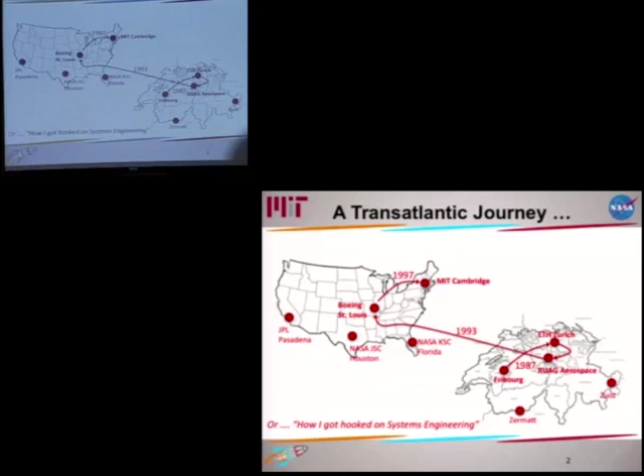I'm from Switzerland originally. My hometown is called Fribourg, on the language border between the German and French-speaking parts. I went to ETH Zurich, then a company called Ruag Aerospace, then made the big jump across the Atlantic to what's now Boeing - back then it was McDonnell Douglas in St. Louis - and eventually found my way to MIT.

The personal reason I came to the United States was that Switzerland was just getting too confining. It's a beautiful country if you've been there, but it's got a lot of rules - it's almost too perfect, and I just needed to come to a place that had a lot of opportunities. So I want to talk to you about this experience and the reason I came here.

There's one big thing wrong with this picture - what's the biggest flaw on this graphic here? So what if we showed them in the right proportions - what would it be roughly? Smaller - like Rhode Island? It's basically kind of like New Hampshire and Vermont, it's like 1/50th, right? So the surface area is way smaller.

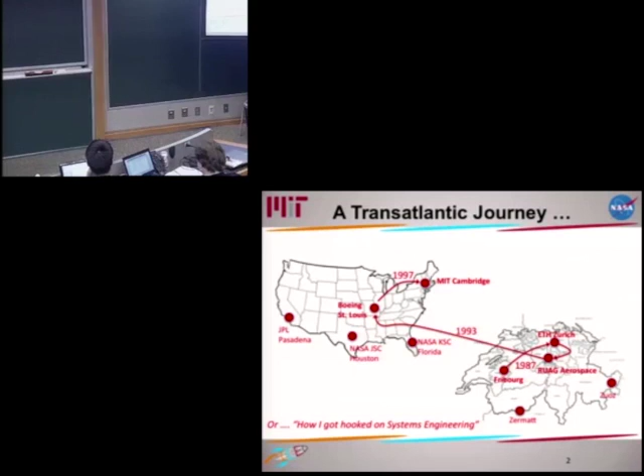So it has great life cycle properties, and that was really the big driver. But there was a problem, and every small country faces that problem. Israel, Singapore—because the country is so small, there's basically no cruise flight. You take off, then you're flying maneuvers, pulling Gs, and then landing.

The average duration of a mission in Switzerland is 45 minutes. The average mission duration for the Navy is like 90 minutes—you take off from a carrier, you climb, you cruise, and during cruise flight things are very benign. So what matters is how many load cycles per flight hour the structure will see. The spectrum in Switzerland and other small countries is about 3 times as severe. That's the number of flexing cycles your wings and fuselage will see, and there's a phenomenon called metal fatigue, and that's a big deal.

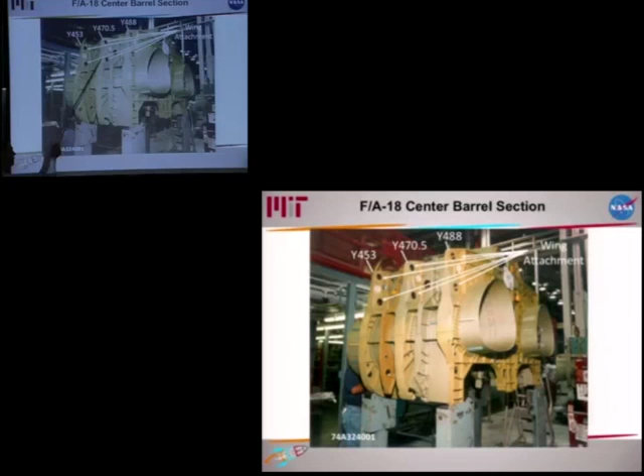This is a picture inside of the F-18. This is known as the center barrel section, the heart of the structure, the fuselage. You see the wing attachment points—these are called the wing lugs. That's where the wings attach, where a lot of the shear loads and bending moment from the wing are transferred to the fuselage. You see the two engine ducts. This is where the rubber meets the road.

If you're flying an aircraft differently than it was designed, you'll start to get small cracks, micro-cracks, that start at the highest stress concentration points, and those cracks can grow. If they become unstable, your aircraft can break apart in mid-flight. That's actually happened—for example, the F-15 is flown by a lot of National Guards, so in some sense this is also an issue in the US, but more at the National Guard level. Some F-15s broke up in mid-flight, and the whole fleet was grounded, because of metal fatigue.

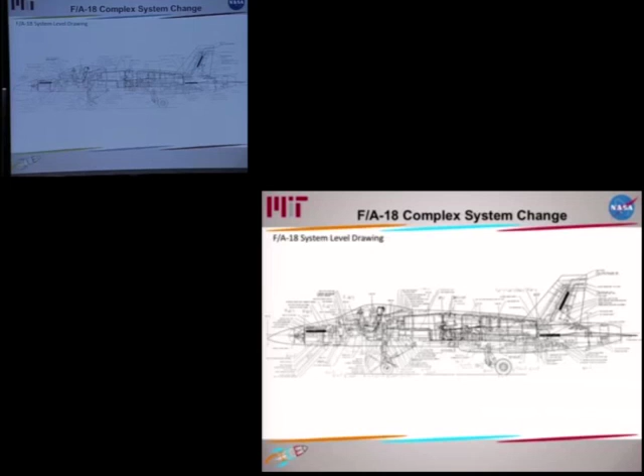So one of the jobs we had was to avoid that problem and think about the whole aircraft. This is a cross-section of the F-18, the single-seater version. You've got the radar system, a lot of avionics, the engines back here, and a lot of the subsystems, hydraulics, etc. We had to think about what things in this aircraft need to be redesigned ahead of time to avoid these problems, namely the problems with fatigue.

I'll give you one example of a change we had to make. That central barrel section of the aircraft I showed you had traditionally been made out of aluminum. Aluminum is a great material—it has great strength, it's lightweight, it's easy to work with in manufacturing. But it doesn't have great fatigue life properties.

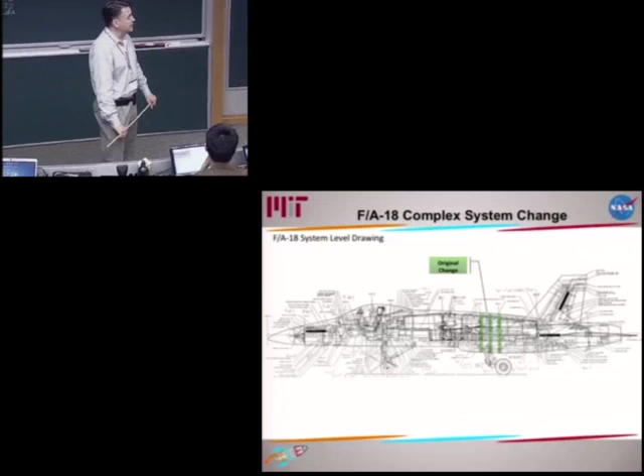So after some analysis, we decided to replace aluminum with titanium. Remember last night when Jeff was talking about the superconducting magnets, and we found out it's a titanium alloy—titanium is a great material. It has great thermal properties, great fatigue properties, and doesn't propagate cracks very easily. The problem is it's expensive and heavier—much heavier. It has a density of about 4,400 kilograms per cubic meter, versus aluminum, which is about 2,700. But we did decide to make that change.

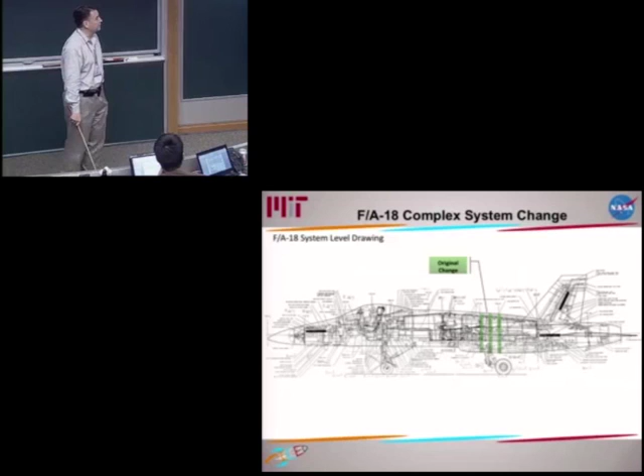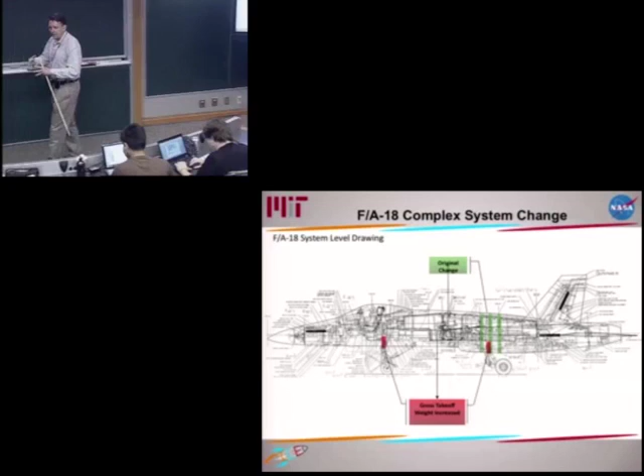We made some other changes as well to get the aircraft's fatigue life to where it needed to be. The problem is this is a complex system. By making that change—shown here in green because it was a good thing, giving us better fatigue life—other things happened. Gross takeoff weight, meaning the weight of the aircraft with the passenger, fuel, everything included, was increased, and that leads to a decrease in range.

Another issue is the center of gravity of the aircraft has been shifted—not a lot, just by a couple inches, but shifting the center of gravity in a complex system like this is a big deal. You have to make sure you have pitch stability in all flight conditions. So this was a bit of a challenge.

A bigger issue turned out to be that we've stiffened the fuselage. This change plus some others—shown here with this line—affects the natural modes of vibration. Every structure, even a simple rod, has natural modes of vibration. Essentially, if you excite it, it will vibrate like the string on a violin. Stiffening usually leads to higher frequencies, so these natural modes of vibration are now higher. That's usually a good thing.

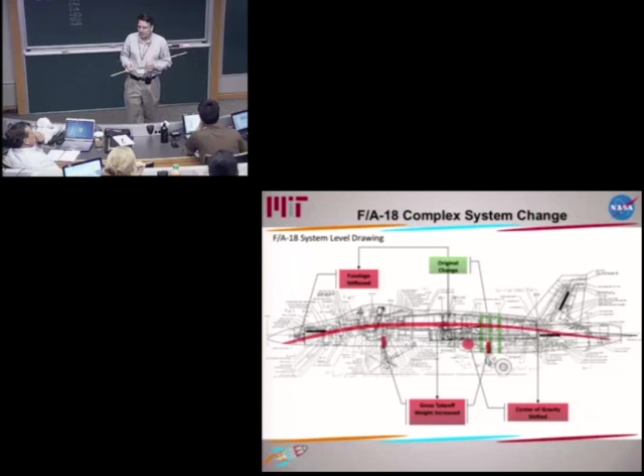The problem is that in a fighter airplane, you have in the flight control software, when the pilot actuates the stick, some filters in the control software, some notch filters, because if you put a step input into the aircraft, the energy at those natural modes of vibration could be destructive to the aircraft. So you have to reduce the energy at those frequencies.

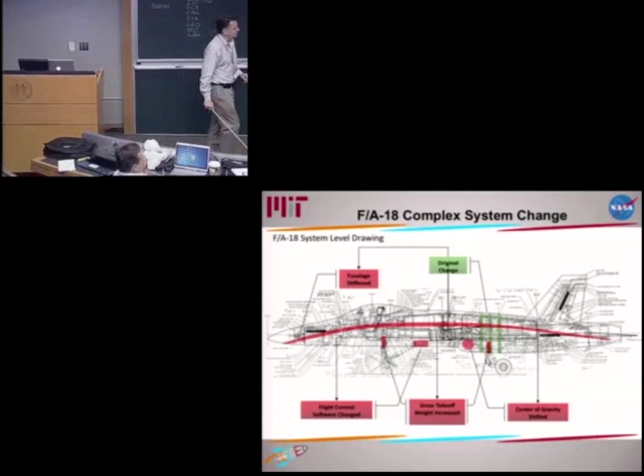So the problem now is that we have flight control software, but we've changed the properties structurally of the structure, and the notch filters are now misaligned with what they were. So we had to retune the notch filters in the flight controller. It's flight critical software, so it's like opening the box and the warranty is void. Even if you just change a few lines of code or a few parameters, you now have to retest and recertify the flight control software, because you don't know what unintended consequences the change could have on other systems.

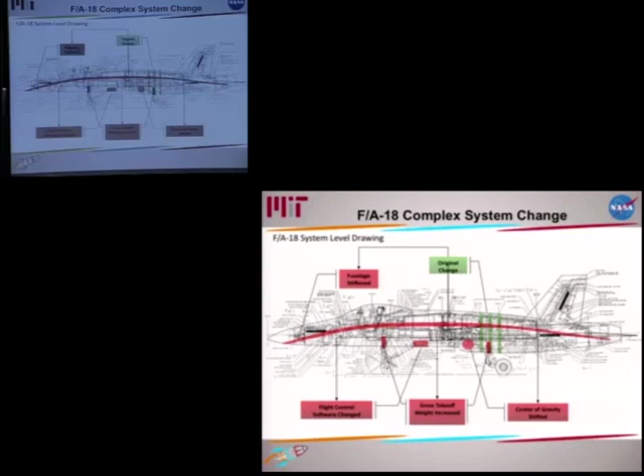So think about this. We started with just changing material inside here from aluminum to titanium, and then through this multiple step process had to make changes to the software. Some of these things we thought about ahead of time, and some of them were surprises to us. And that's kind of the excitement - that's what got me excited in systems engineering, trying to make this more of a science rather than an art.

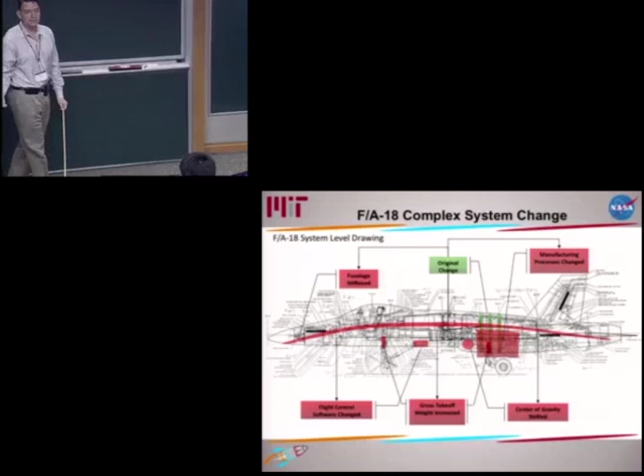Also, a lot of issues in manufacturing. Aluminum and titanium are different materials. You need to use different drill bits, different fasteners. Everything basically has to be recertified.

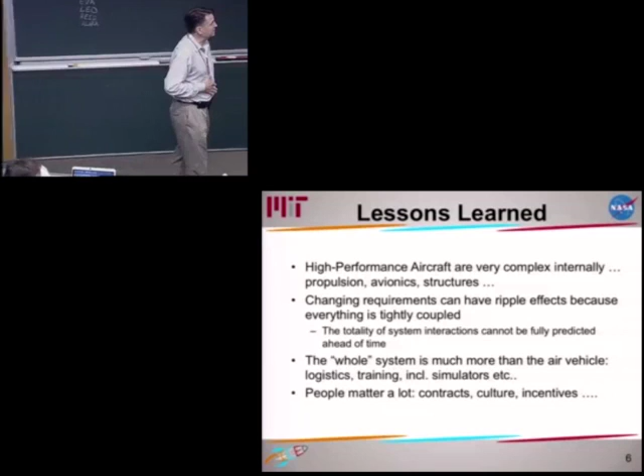So I don't want to get into too much detail, but for me this was a transformational experience and a lot of lessons learned. High-performance aircraft are extremely complex internally, just like spacecraft. You have avionics, propulsion, structures - everything is coupled, and if you want to make a change because you want to just change this part of the system, it's very likely that those changes are going to cascade and cause other things to have to be changed as well.

I'm not sure that's as true in all fields on Earth - we could have a discussion. Is it true in, where's Larry? Is he here? Architecture, right? Buildings - if you change something, it may be true as well in some buildings, in various products.

This is a big deal. Changing requirements can have a ripple effect because everything is tightly coupled. The whole system is much more than the air vehicle. So this was another learning experience for me.

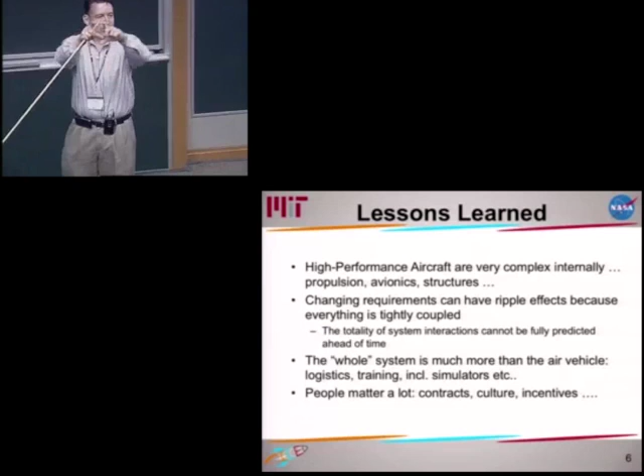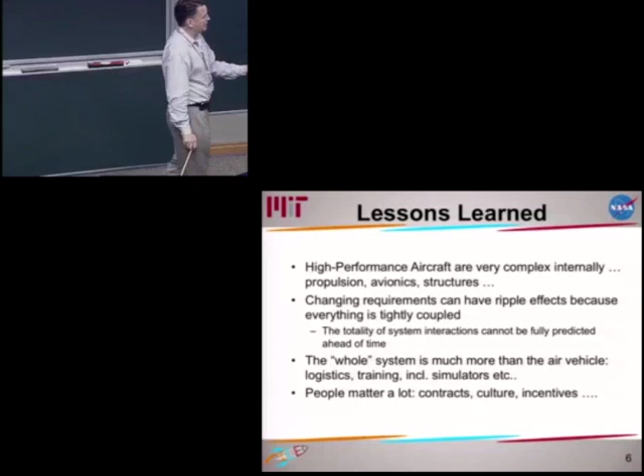I showed you a diagram of that aircraft, but that's not the whole system. In order for that system to deliver value, it takes logistics, spare parts, training of the operators, training of the pilots, simulators, and so forth. And then people matter a lot. It isn't just about the physical thing that you're building - I could show you a diagram of all the contracts involved, of the people building the aircraft, building subcomponents, providing spares, providing information and support, working across different countries, the different cultures and the incentives involved in that. That's part of the whole, that's part of the system too.

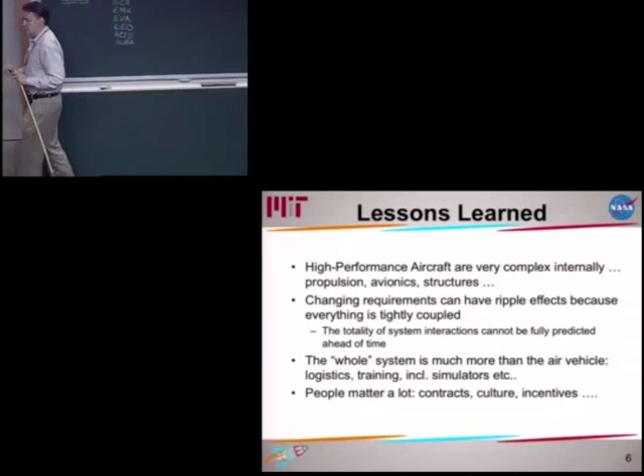So just a quick introduction into what got me interested in thinking about systems engineering and system design more deeply. Now I'll take a step back and just talk about very basic steps. How do you describe a design process? This is one of the reasons I unfortunately had to miss Larry's lecture - I was at a meeting for Unified Engineering. This is our sophomore class for aerospace engineers, where we get into connecting the disciplines and thinking about design in a more systematic way. So what we do in Unified is expose students to a way to think about design in a systematic way.

And these 7 steps are the most basic way in which I know to describe the process of designing a system or a new product. So the first thing you need to do always is define requirements. You need to understand what the needs are, who your customer is, and what are they going to do with your system.

So Frank showed us the importance, for example, of whether you're operating in low Earth orbit, LEO, or interstellar. You said the GCR is 3 times higher once you leave the heliosphere, essentially, right? So, and how long are you traveling?

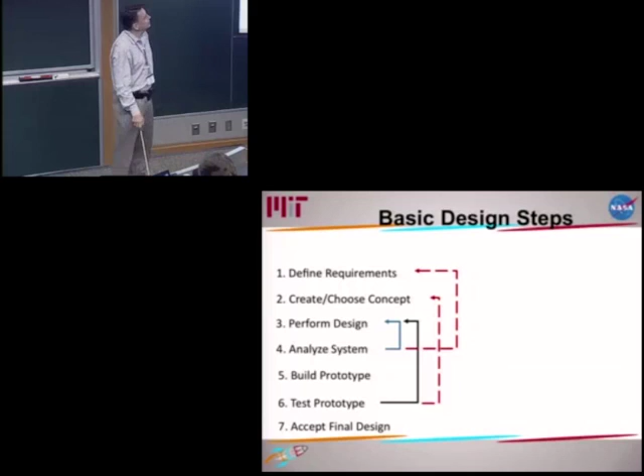They're a little different colors, and they're a little different. The solid iterations are the ones that, in a sense, involve sort of physical prototyping and are typically done. Think of the solid iterations as the ones that are very frequently done and sort of value added. The dashed ones are the ones that you'd like to avoid.

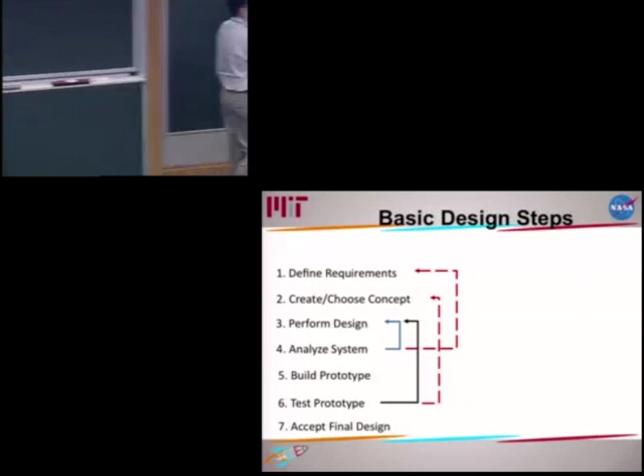So when Charlie this morning showed us the example of the X-33, the hydrogen tank didn't work, wasn't feasible. When they tested the prototype, they were out of money and out of time to go back and change everything, right? That's how that relates.

So what are some of these iterations? You analyze the system, and it's close to working, but not quite. You have to tweak the design, and then reanalyze it. So you might iterate here.

Maybe things look good all the way to testing, and then in testing the prototype, you discover something you didn't know, some phenomena or something that surprised you. Your electronics are overheating. You thought they weren't going to overheat, but now the heat loads are higher, or the external cooling isn't as much as you thought. You have to go and redesign.

This loop here implies that you really did a good job. You think you picked a good concept, a good design, but the requirements don't look like they're feasible. You were perhaps overambitious in your requirements, and you have to go in and perhaps negotiate and relax some of the requirements.

And then, of course, here, this is a bad one too, where you did everything right, you're testing your prototype, and you're coming to the conclusion that you picked the wrong concept. You have to really go back to the drawing board and start from scratch.

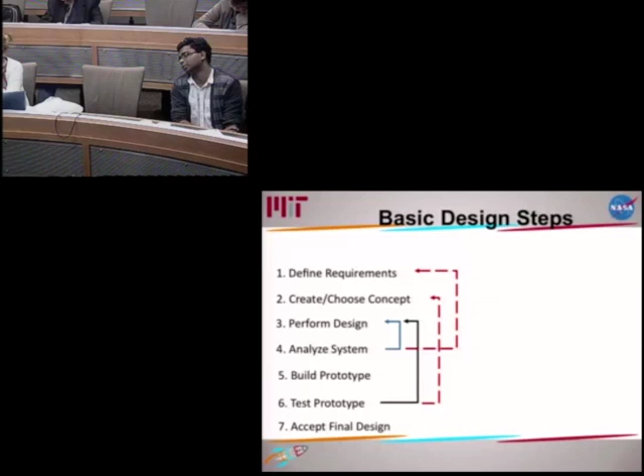Yes? I was wondering, when you say analyze and test as 2 different steps, what the real essential difference between both of them was. The difference is that step 4 is mainly analytical.

So you're either doing a model on math, either doing hand calculation, solving a set of equations, or you wrote a computer program that simulates the system. You can go very deep there.

And this means you have a physical prototype that you're now testing, like wind tunnel experiments, or the testing with mice that you mentioned - those are good examples of actually testing with real things, because often you have surprises. One of the things we'd like to do is, ideally, this testing of prototypes is confirmation of what you already knew. And then people might say, well, that was a waste, we already knew that. Well, it wasn't a waste because the prototype gave you more certainty.

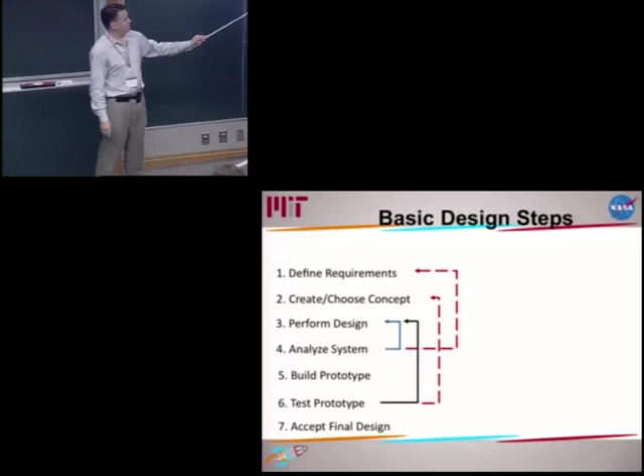But many times prototypes surface things that weren't included in the mathematical model. Yes, please.

In the first part, I'll give two different examples. One is where you know the problem, like an aircraft developing stress fractures and fatigue that's pretty well known—how do I fix a known problem? The other case is where you're not really sure what the issues are.

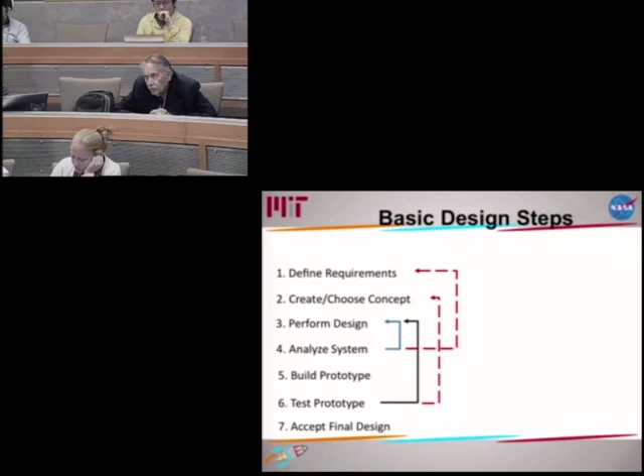I think embedded in the first case is also understanding the issues and the parameters, because too often designers go off and design a problem that doesn't exist, or design the wrong problem and come up with a solution that creates a problem—rather than say let's design a chair, let's design a support system that doesn't presuppose it's a chair. That's kind of a dumb example.

No, I completely agree, and this is a big tension: how much time do you spend really trying to define things? This is a big issue at NASA—how deep and detailed can you get in the requirements before you actually start building and trying things? But building and trying things consumes a lot of resources, because tooling and materials are expensive. So there's a real tension between spending enough time up front to make sure you're solving the right problem before you start spending big bucks on prototypes.

On the other hand, you can't really discover everything up front without doing more detailed work.

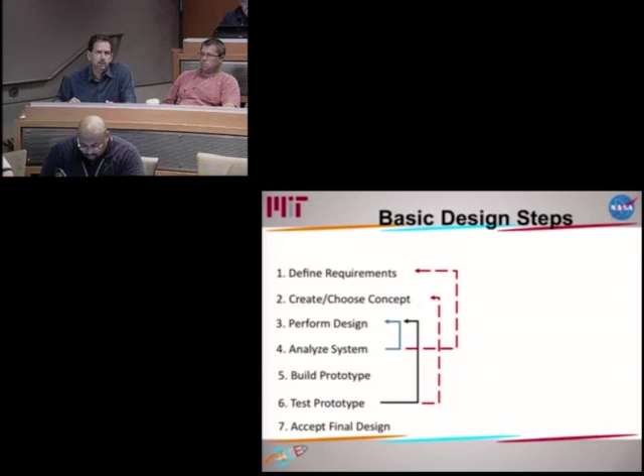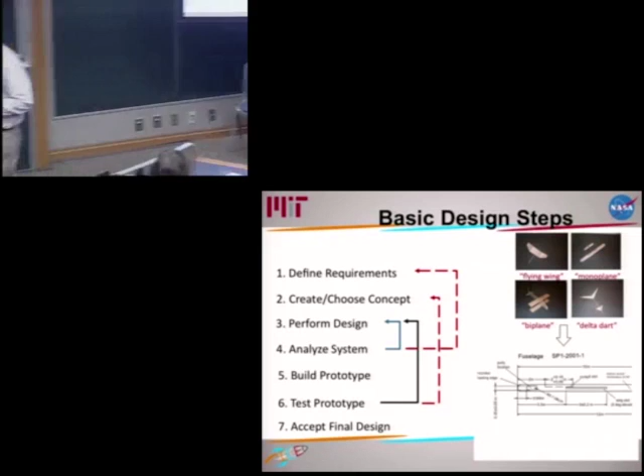Good. Let me move forward, and then we'll have time for more in-depth discussion. With the unified students, one of the first things we do is have them build balsa wood gliders. Right now they're at MIT and they think they're hot stuff, and this is a very humbling experience for them—designing, and then flying them for time of flight and distance.

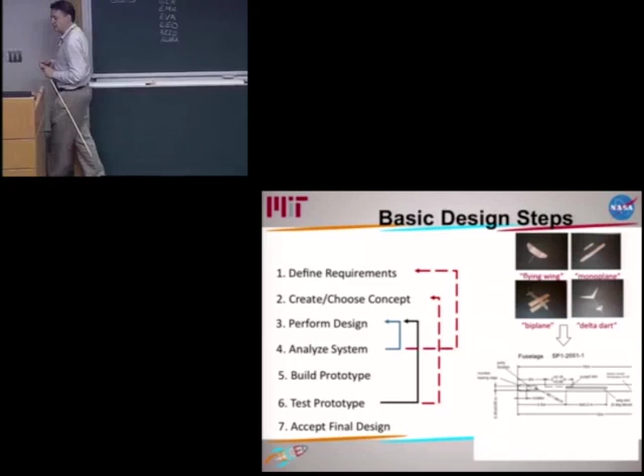But that's the first time they really get to think about design, documentation, and then iteration. It's very humbling to really design a good balsa glider. The other thing I talk about, in the context of the balsa glider, is the important distinction between the design space—the parameters of the problem—and the objective space.

This is very basic, but I think it's crucial that students really understand this. So the design space fundamentally describes what you can think of as the knobs that you can turn in the design. As a designer, choosing the concept determines what the knobs are. For example, here we have wing area.

You can change the aspect ratio, which is whether you're going to have short stubby or long skinny wings. The dihedral angle is whether the wings are straight out or whether they have an angle with respect to the horizontal.

Those are things you as a designer can choose, it's within your control. On the right side, this is what we care about, what we want to achieve: performance at some cost. So time of flight and distance flown are the two big objectives we're trying to achieve, and typically we want to maximize those. Cost is primarily time, assembly time, and material costs that we care about.

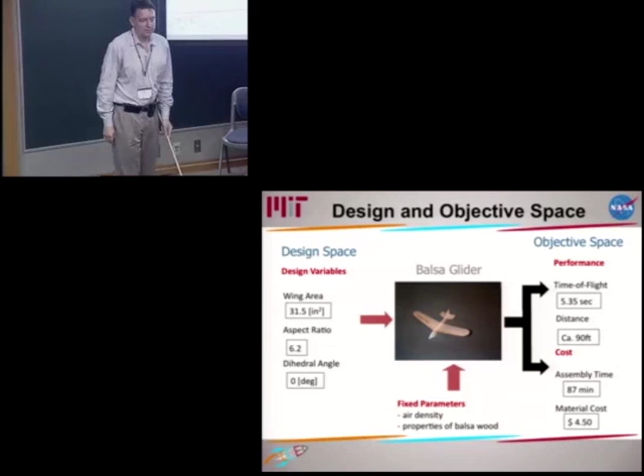Then we have fixed parameters. These are things that influence performance, but we can't choose them as a designer. They're given by nature, by physics. In this case, the air density, and then the properties of the balsa wood: its density, and balsa wood is anisotropic. Those are things you can't really influence.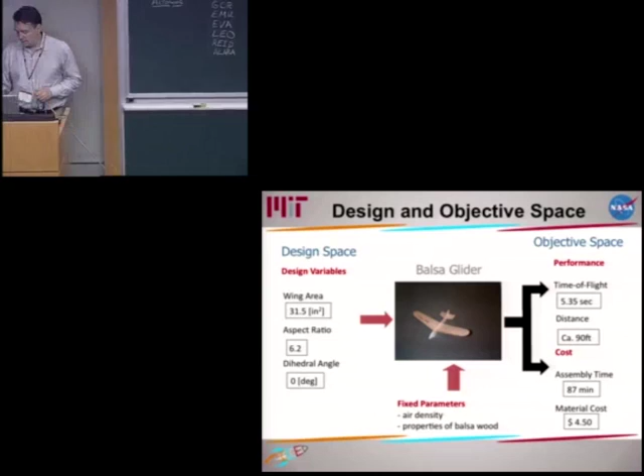So we start talking and thinking about that. Last time we taught this class, we did the icebreaker yesterday with your wonderful advertisements for why we should go to Mars. We did a slightly different icebreaker at Penn State. We started out with this egg dropping exercise.

I'll show you very quickly, we took some high-speed videos of that. We gave the teams eggs, some very basic materials, and then higher and higher drop height, to design basically a load attenuation system. So this is one of the examples.

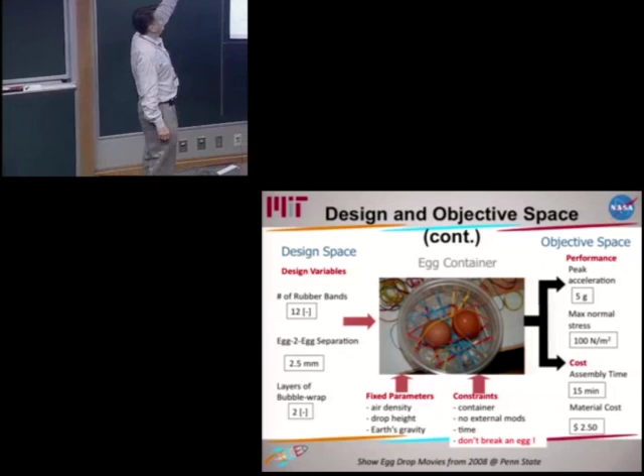It's the same thing, you're going through the same thought process. You have design variables. If you look at this concept, their approach was cross-strapping or separating the eggs through rubber bands. You have how many rubber bands you're going to use, fewer or more, there may be an optimum. What's the right egg-to-egg separation? If the eggs are right on top of each other, then perhaps both are going to break together.

If you put them really far apart, they're going to get close to the container walls, since everybody had to use the same container, and that may not be ideal either. How many layers of bubble wrap are you going to use? Those are decisions you can make as a designer.

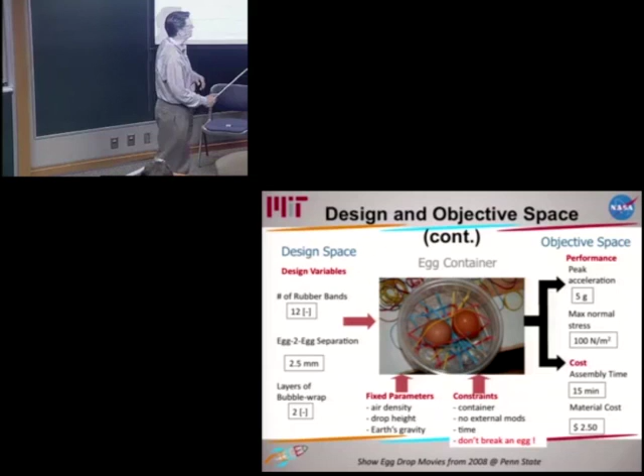Again, fixed parameters: air density, drop height, Earth's gravity, you can't really influence. And then constraints, these are parameters within which you have to operate: the container itself, no external modifications, and how much time you have. And of course, don't break an egg.

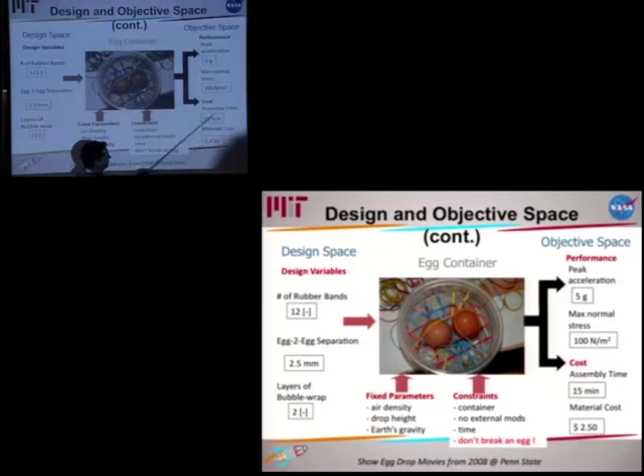You could also argue that this is an objective or a performance measure: peak acceleration, the maximum stress on the eggs, and then the assembly time and material costs. Those were the objective space.

Let me just show you very quickly. It was quite okay, this is great footage that was taken here. We had one of Charlie's colleagues. So you can see here the drop height. Team 1, round 1, drop height. This was not a good one. What was the outcome? Different teams tried different things. That was pretty successful with cotton balls. They try to see, that's a parachute. So we had a lot of fun here, just trying to basically achieve the performance outcomes using different concepts and then different design implementations.

We can post this, I'm going to keep going here. But even an icebreaker exercise like that is essentially doing this process.

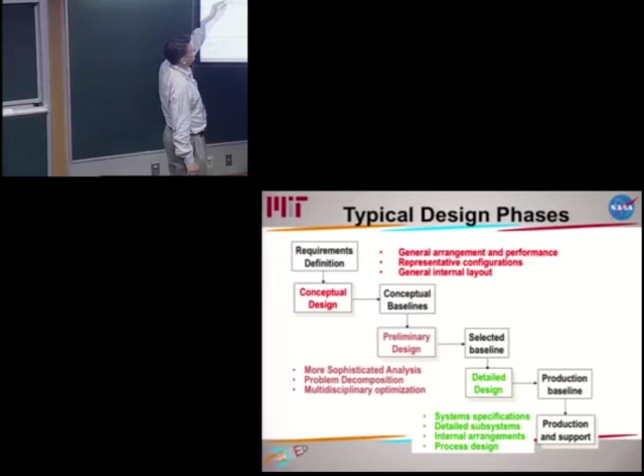Now, when you get into organizations and you formalize this, we talk about design phases, not just design steps. Typically you have a conceptual design phase, that's where you decide on the general arrangement, representative configurations, and the internal layout of your system.

In preliminary design, you do more detailed analysis. You decompose the problem, maybe you do some multidisciplinary optimization. Then typically detailed design means you're now implementing the design to a level of detail where you can hand somebody a blueprint and say go build this. So you have essentially something that is known as a production baseline.

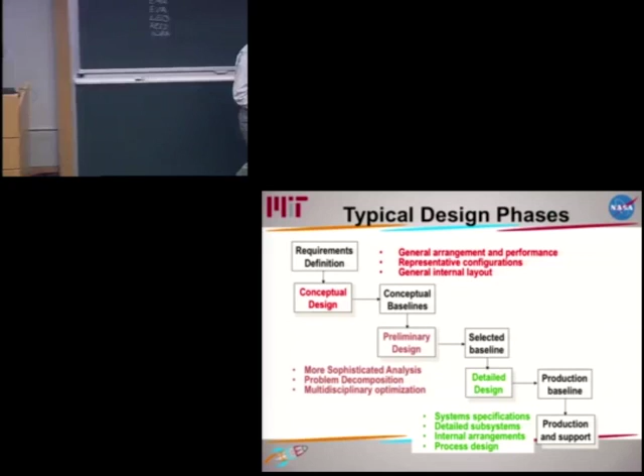It's now detailed enough so you can hand it to somebody and say, go build this. That's the reason we call this a waterfall process, because in some sense you can think about water flowing right through these steps, like a waterfall, and it just keeps flowing down until you have a design that's done and that you can build.

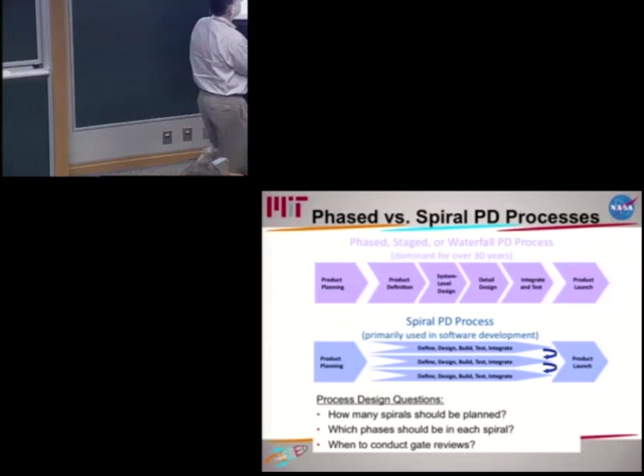Then you go to the next spiral, and now you're going to pick up maybe the next 3 requirements. You're going to build in what you've learned in the previous spiral, and you do this essentially until it's time to launch your product. So that's a different model, and the big questions are, how many of these spirals should you do? Which are the phases? Because you might not have to do all the phases in each spiral.

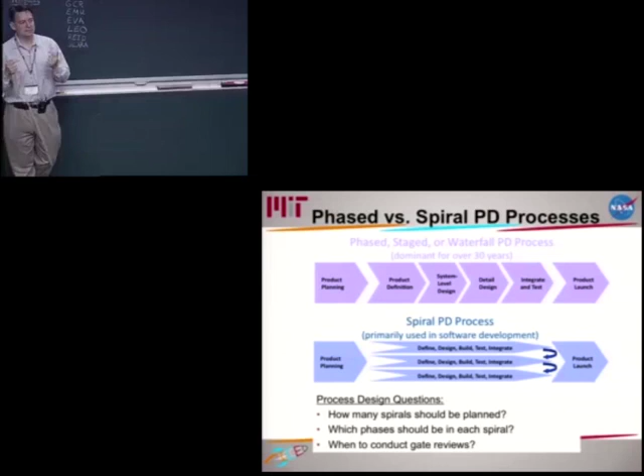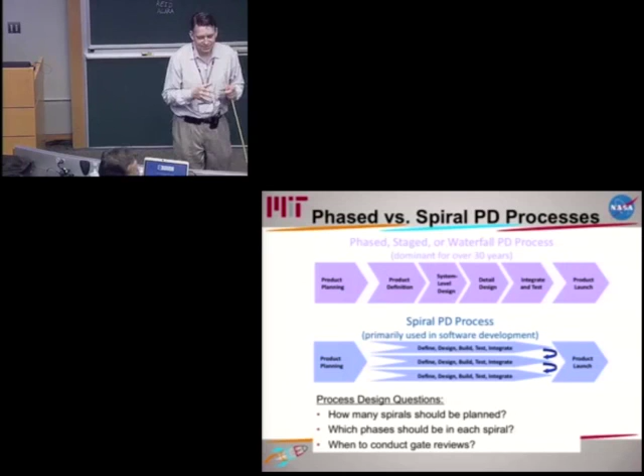And gate reviews - that means at some point you have to show your design. There's somebody who's going to look at your design and say, okay, you've shown us enough, we're satisfied with what you've done, we're going to give you another $2 million or $200 million to go to the next phase. That's a very important part of design, having some external review. Like Charlie said this morning, your design is your baby. You get very attached to it, and if your baby has some blemishes, you don't want to hear that. Well, you do need to hear it, and the role of these gate reviews is to do that.

So getting back to this waterfall process, often we show these gates with this diamond symbol. That's a milestone, that's how we designate milestones. The idea is that you can only go to the next phase if you successfully pass that review. If not, then you have to go back up and iterate, and those are the unplanned iterations that we have talked about.

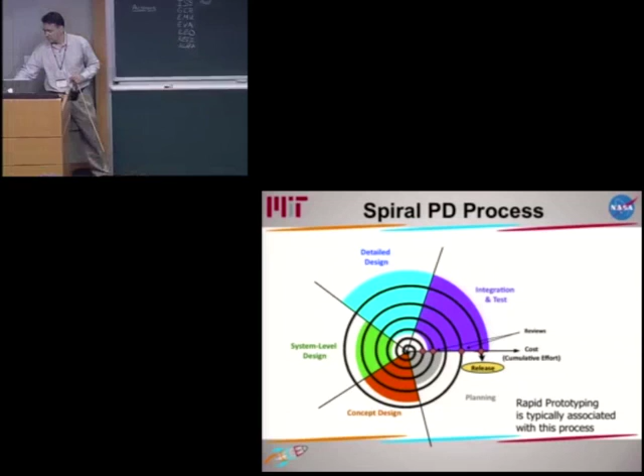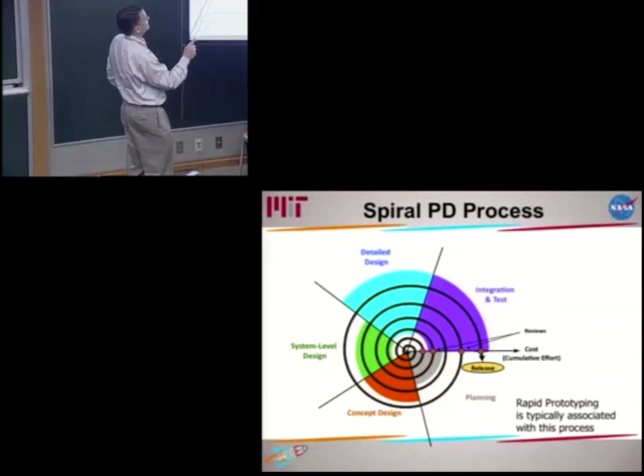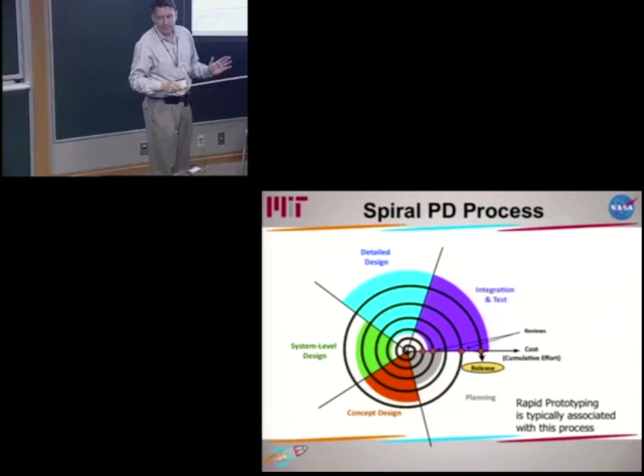Here's a visual, typically how the spiral process is shown. There's another way I'll show you. In spiral, we go through conceptual design, planning, conceptual design, system level, detailed design, integration and testing, and then the release. You always start the spiral from the center. The spirals are kind of small at first, meaning the pathway for going through all these steps is pretty short, so we do this very quickly. Then in the second spiral, we have a review at the end of spiral 1, and the second spiral is a little more comprehensive, so it takes a little longer. We do this until we're ready to release the product.

So rapid prototyping, the idea of doing this quickly, using maybe not the final materials but a substitute material, is exactly that process. You know, I look at that - it almost looks like a building block approach. You start very small, maybe do multiple things simultaneously in that spiral, but it's very much a building block approach until you're coming up with almost a full-scale design at the end.

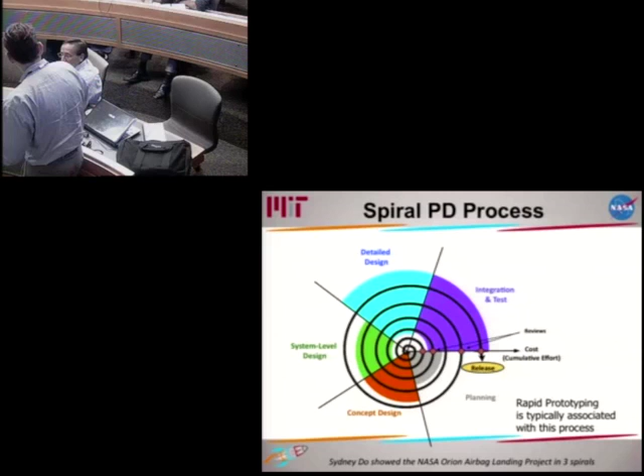Am I missing something? You could do multiple spirals in parallel. You want to make sure things fit together at the end, but no, that's right.

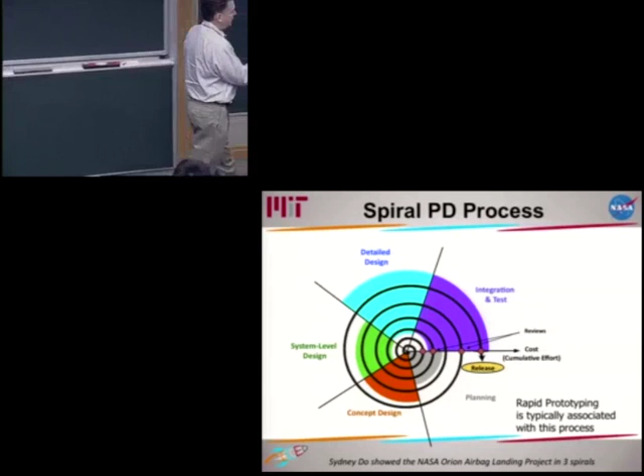So last night, Sydney showed you a version of this chart, and he talked about the Orion airbag landing project, with 3 spirals. Do you remember what they were? Spiral 1 focused on an analogous material—not the exact material, but looking at peanuts, using bean bags instead of airbags, with the general configuration.

What was spiral 2 about? Remember? Charlie? No. What was spiral 2 about? The number of airbags? Yeah, it's close.

It was about the venting dynamics, right? So spiral 2 was a single airbag, but getting into a lot of depth on all the valve designs to make sure they wouldn't leak. It's retrenching to just a single airbag to really understand the airbag dynamics, designing these butterfly valves to really work and be tight. That was spiral 2. Spiral 3 was the whole setup with multiple airbags, all with valves, with the drop test article.

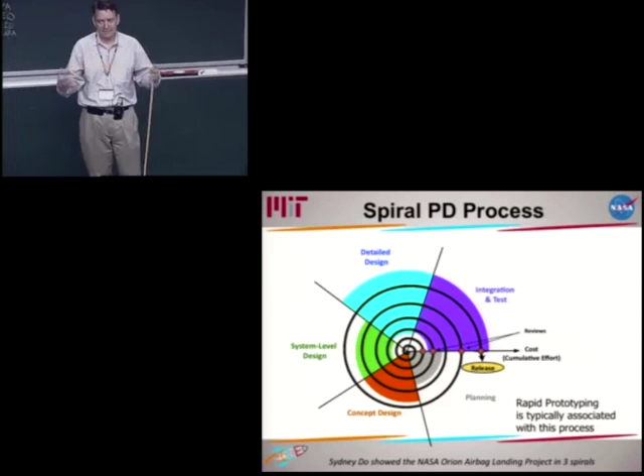So that's the idea—you don't wait until you have everything, but you try to do a spiral, get to an intermediate product, learn from it, and then launch into the next spiral. That's fundamentally the approach. This is just a different way of showing it.

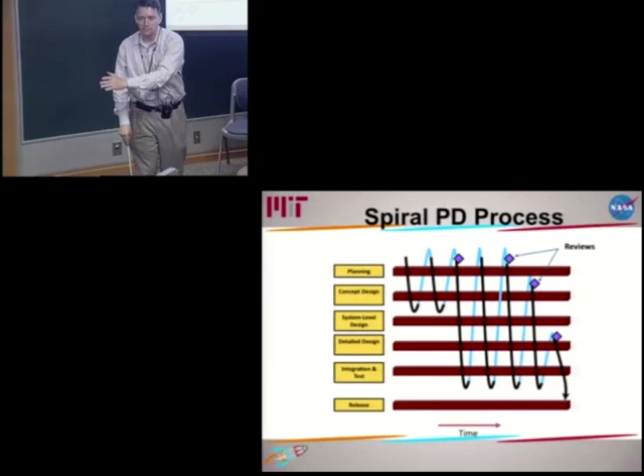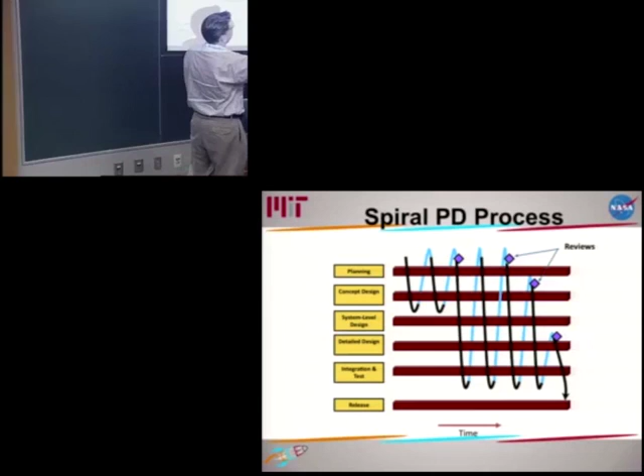The point here is that you can do spirals that don't include all the steps. So you could do a spiral that does a computer model but doesn't actually produce a physical artifact. These are the streams of work we have, and now we're going to work through the project by picking up multiple of these phases and doing different reviews until we're done.

So there's a lot of possibilities for how to organize a project or design process. I want to give you quickly some examples from industry. This is from the NASA Systems Engineering Handbook—the official way NASA does projects. You have pre-phase A, concept studies, phase A, B, C, D, E, and F is new.

Phase F is closeout at the end—you retire a system, you archive the data. But what does that look like? Is that more a waterfall, or more like a spiral? It's very much a waterfall. That doesn't mean you don't have iterations within each phase, but the basic idea is that these big milestones, these key decision points, drive the decision of whether you're allowed to go to the next phase. That's essentially how programs are done at NASA.

Not just at NASA, but other organizations building expensive things. Here's an example of BP's project common major process. They have 5 phases: appraise, select, define, execute, and operate. I'm not going to get into details here, but the idea is that you have to be comfortable with some amount of risk by going to the next phase—you can't have full certainty as to what's going to happen.

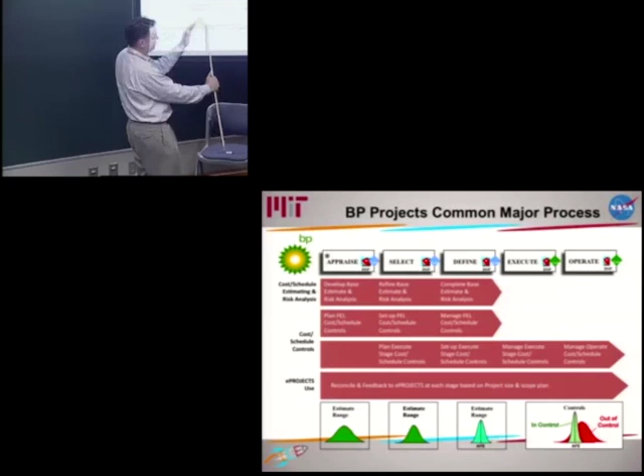We saw, obviously, that in BP's case, they really screwed up in terms of managing risk in the Gulf of Mexico. But the idea is that as you go to the next phase, you see this risk curve—we talked a bit about risk, and Frank talked about risk reduction in understanding the biological effects of radiation. So as you go to the next phase, that distribution gets narrower and narrower, and you're getting to more certainty as you go down the path.

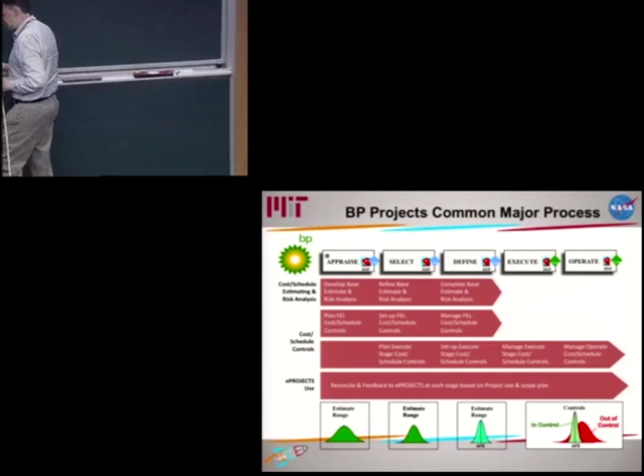Here's a third example, one I like—a little dated by now, but interesting. This is Xerox, multi-function office machines. In this case, you have a web-based interface. These machines can print, scan, and do a bunch of stuff, and they call their process TTM, time to market.

What's interesting is that it's basically also a waterfall process, but for the software, they follow a spiral model. The reason this is a big deal for Xerox is that every 4 years, the Olympics come up in London. The printing industry also has their Olympics—a big trade show in Germany every 4 years called Drupa.

So Drupa is where all the big manufacturers, Canon, Xerox, HP, show up with their new machines, the new generation of machines, every 4 years. And it's not just people walking around sipping champagne. People actually come with their checkbook and place orders for new machines. So you have to make that conference, that exhibit, and you have to be ready with your new machine.

So the reason they do the spiraling is because there's a list of features that they would like to have in the next generation machine. And they prioritize: the top 10 features, the next 20, and they work on implementing these features in this spiral way. As the deadline approaches, those features that look like there's not going to be enough time and resources to implement are basically going to be delayed until the next generation.

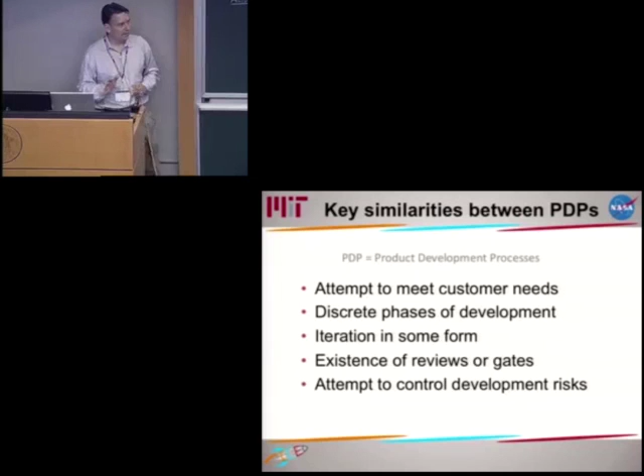Yes, Sven? There's this propensity for feature creep, which happens, particularly when you have engineers involved—they're like, wouldn't it be cool if we did this as well? That's when you have to shoot the engineer and say, we need just the bare minimum right now to get this product launched. In the aerospace industry and space systems, feature creep is one of the big problems with scoping out a project. I think you're right, and it's interesting because we engineers often put the blame on the marketing people, like it's the marketing people trying to shoehorn all these things in, but we may be culprits too.

Absolutely. So I'm going to wrap up here for time, and we'll have a short discussion. I just want to get through this, and then we'll have a discussion. So the examples I showed you, no matter what your PDP, product development process, is...

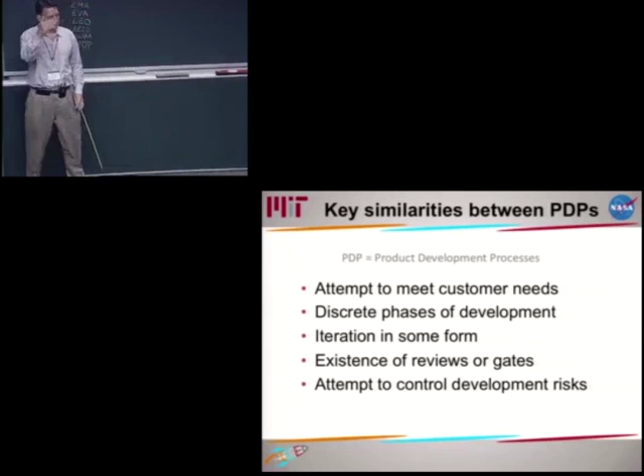...you're always going to have these features. You're going to try to meet your customer needs. You're going to have some discrete phases of development. There will be iterations, even if you don't want them, you'll have them. You'll have reviews or gates you have to go through, and an attempt to control the development risk. So, for example, segmenting the requirements into things that are absolutely essential versus things that are nice to have is one way to do that.

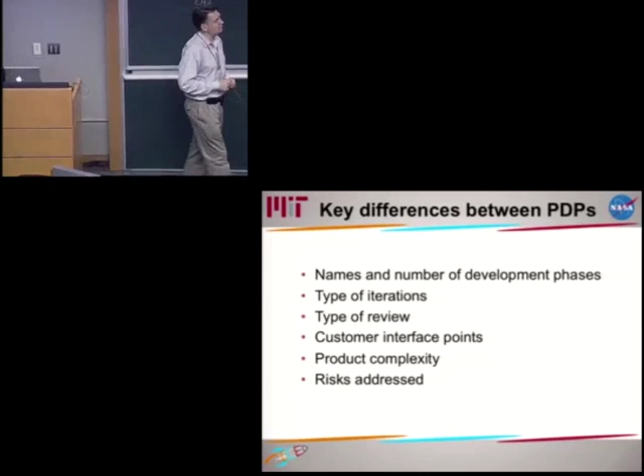There are other ways, but there's also key differences between different organizations and approaches: what names people put on these phases and how many they have. Is it a 5-phase? Is it a 7-phase process? The type of iterations, type of reviews, where does the customer get involved? Sometimes the customer is only involved once the thing is on the shelf to be bought, right? That's not necessarily a good thing.

There are companies that are very good at bringing in customers quickly and frequently. One of the advantages of spiral development and rapid prototyping is that at the end of every spiral, you have something to show, something to share. Your customer can come in and say, I like this, this doesn't make sense to me, and you can take that into account. Obviously, the complexity of the product, and the types of risks you're going to address, matter too.

There's been quite a bit of scholarship on this here at MIT, trying to make this into a science and understand what kind of design process makes sense for what situation. The way you'd go about this is you'd establish a risk profile for your project or undertaking.

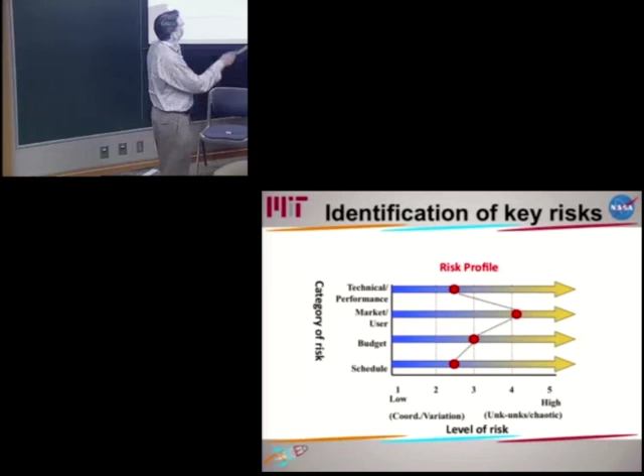Budget and schedule. Schedule is a big deal in many projects. The 4-year Olympics of the printing industry is one way to think about it. But if you think about launching to Mars, what's the big schedule consideration?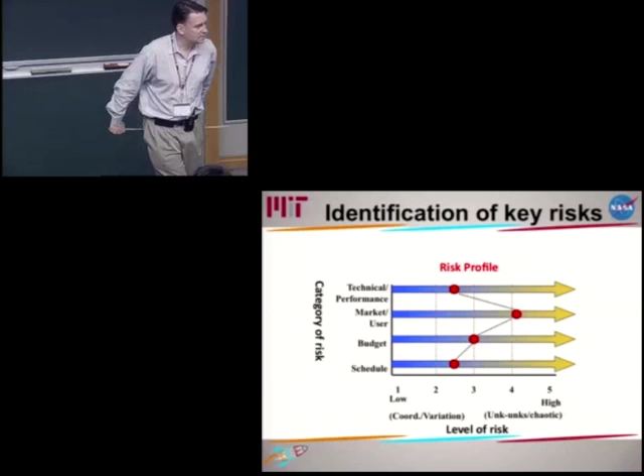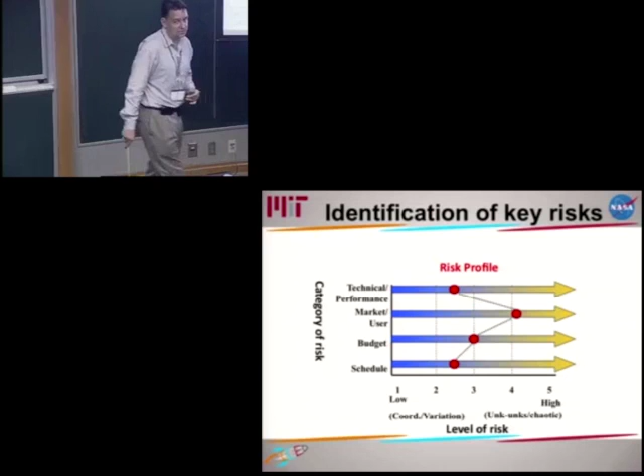The solar cycle is 11 years. There's another shorter cycle too - there's the political cycle, every 4 or 8 years, but there's another one that's really important: the periodicity of launch windows to Mars, which is about 26 or 27 months. That actually happened to MSL - it was supposed to launch on the last launch window, missed it, and had to wait 2 years, which they used to improve the system. But that's a big deal.

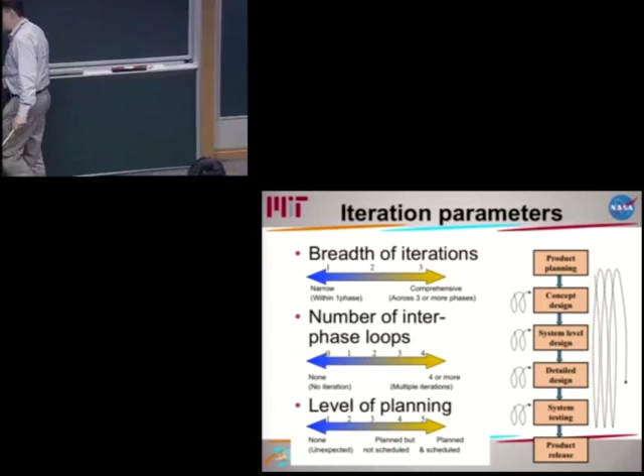Without getting into too much detail, there are a lot of choices. How many iterations are you going to have across phases, and inside of the phases? Are these iterations planned and scheduled, or do you just get into the project and let them happen to you? And how rigid are the gate reviews?

I've been in reviews that span that whole spectrum. If you're on the less rigid side, the review is just a check-in - how are you doing, is it progressing - and there's not a lot of consequence.

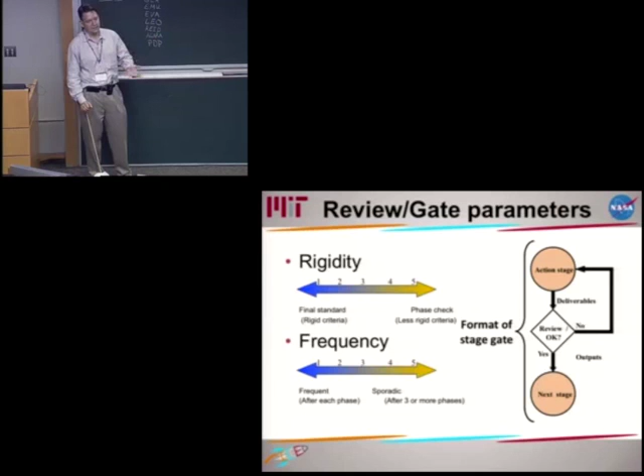On the rigid side, it means unless you meet this criteria and this is done, we're not going to allow you to go to the next phase, and you won't get the budget to build your flight prototype. Very rigid criteria. Then there's frequency - how often are you doing this? One thing I heard at NASA, on an NRC committee where we looked at about 70 flight missions, was that there was a sentiment these reviews were getting very frequent, and it was sidetracking engineers from useful work because all they were doing was preparing presentations for the next reviews. So there's a happy medium there.

Now to get a little more organized about it: you can think of the waterfall process, the traditional stage-gate process in design, as having zero interphase loops - very planning-oriented, with rigid phase gates that are rigorously enforced. On the other side, there's the spiral process with an unspecified number of iterations - you don't really know ahead of time.

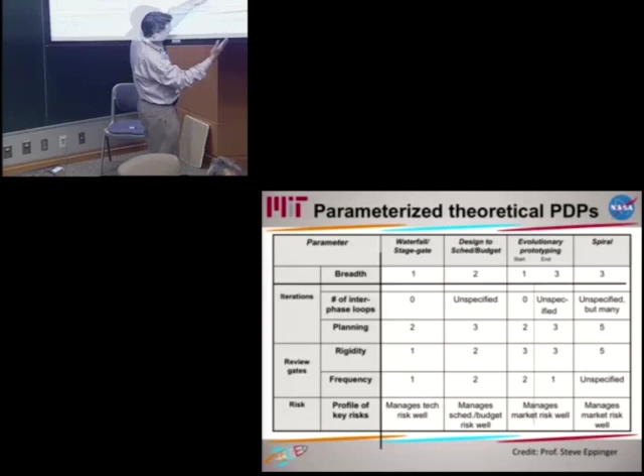This particular analysis was done by a colleague of mine here, Steve Eppinger, at the Sloan School. He and his colleagues claim that if you're dominated by technology risk, you should do more of the waterfall process. And if you're dominated by market risk - you're not sure what your customers really want - you should do more of the spiral process.

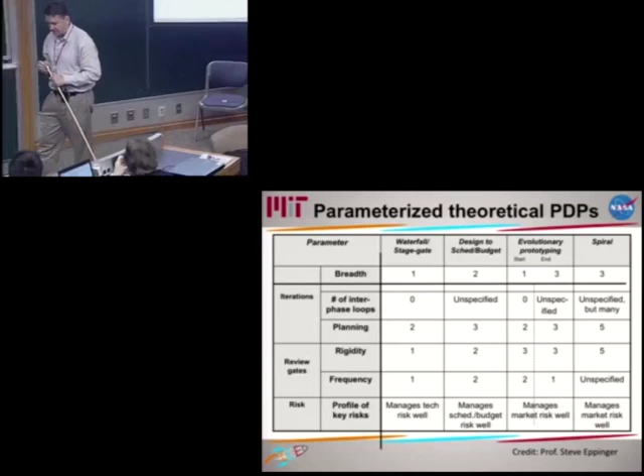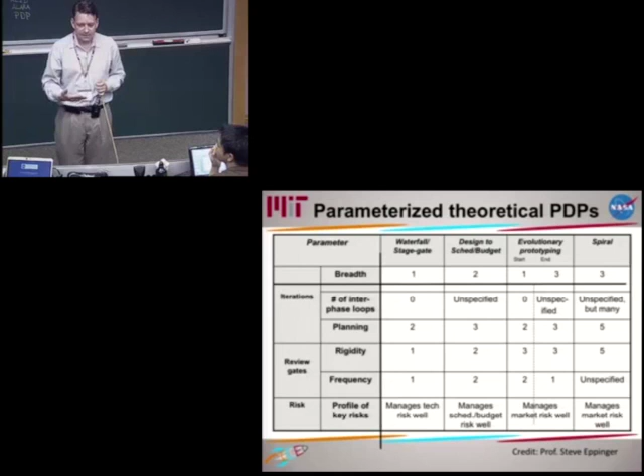I was thinking about this as Charlie was presenting, because this is a little different, right? Charlie is saying we should do spiral development - learn and break things early - because we have technology risk. The way I think about it: when you're working on new ideas, breakthrough technology without a lot of maturity, working this way is also good for managing technology risk, because you're going to push the technology you have to the limit.

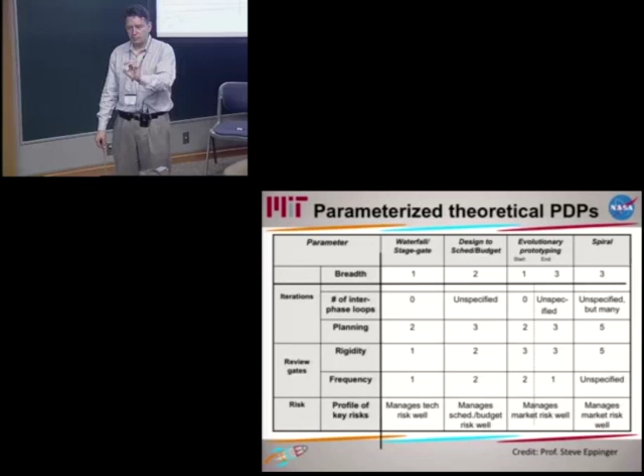You're going to break things, you're going to learn. Once the concepts have been proven, or you know that a certain concept or idea is promising, then it makes sense to inject it into a more traditional, organized stage gate approach. So I think those things are not incompatible.

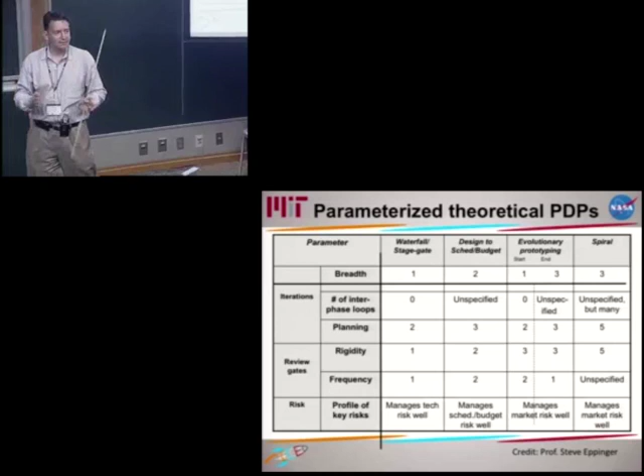But Charlie, I don't know if you agree with that. I look at it slightly differently, Ali. I look at it like, when you have to work in the conceptual phase to come up with many potential solutions to problems, you're looking for something - maybe the problem you don't want a conventional solution for. You don't want an incremental improvement like the next generation airplane, where you have a very rigorous approach, but you're only going to get an incremental gain.

When you're looking for a revolutionary approach to solving a problem, or a problem of such epic proportions that it's monumental to solve, you want to try as many things as possible, and mature those possible concepts as quickly as possible in order to solve it. In some cases you have to solve a tough problem, and it's not only very tough, but you have to do it very quickly. So you could roll the dice and select the problem quick, or you could try a lot of them.

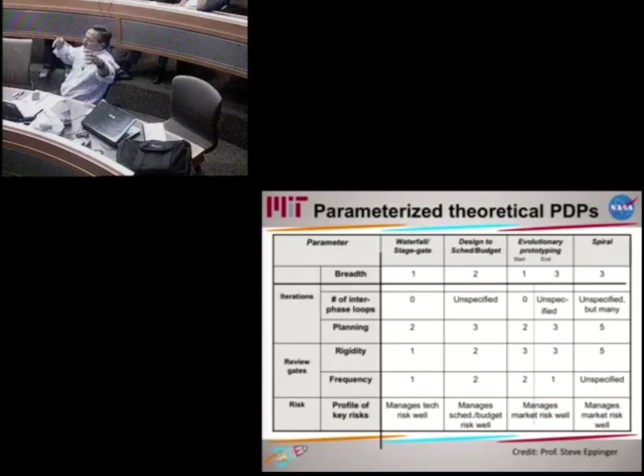No, but I think that happens on the right end of that spectrum. Yes, I agree with both of you that which approach you use is probably the hybrid in any case, but I think one of the downsides of the waterfall process is that you buy into a concept very quickly, and then there's a risk that it's not the right concept.

That's right. I think there's another risk that once you buy into a concept, you're married to it, you defend it, you become invested in it, and you will do your darndest to make that square peg fit in a round hole because you're invested in it, and the clock's running. So you say, maybe if I get a bigger hammer, I can pound that peg in.

With the spiral process, I think it also implies two things. One is that you can break some eggs early, and get the experience of breaking the eggs, and get into the process. You can look at which are the showstoppers, and spiral around them, and say, let's see if this solution is going to address the big problems before we get to the small ones.

So it also gives you an opportunity to look at these as trade studies, where it's a multi-spiral, and you're spiraling a lot of these concepts, and some of them may have commonalities, where you're looking at different iterations of a kind of common theme. But I think in some respects you're minimizing risk, so that at the end game you don't come up dry, or with a project you can't sell.

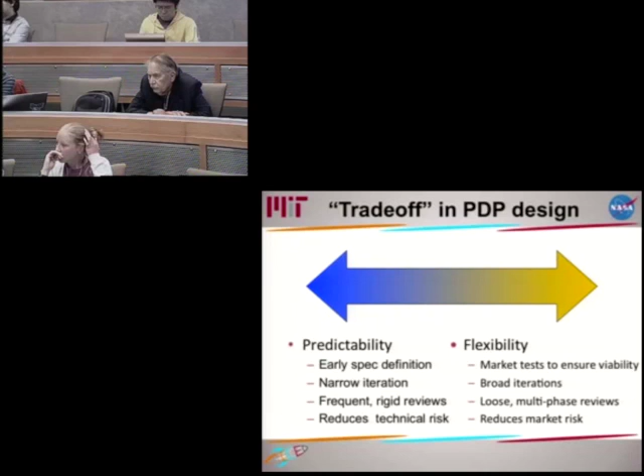That's right. And so that thinking, to try different things quickly, is more on the right end. There's a spectrum here in product development processes, between more flexible, trying things quickly, learning as much as you can, and on the left side, the bigger and more complex. It's a kind of tough tension - the bigger and more complex things get, the more phased and careful and organized you have to be.

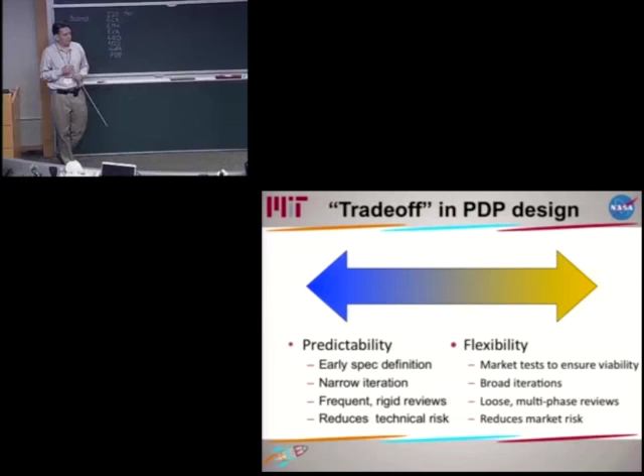So I'm getting the signal here from Charlie that we're at the end, but I just wanted to give you a little bit of a flavor for thinking about design. Our focus this week is on the early part of that process - conceptual design, a little bit of preliminary design - but making these choices, how many phase gates you're going to have, how many prototypes you're going to build, this is all really crucial. This is why a lot of companies spend a lot of time thinking about, and are constantly trying to improve and iterate, their product development processes.

But the key points here are: spend enough time. This gets back to the 1%. Let's try to spend more than 1% on conceptual design, because the downstream impact of those decisions is huge. And doing spirals, including cheap but valuable prototyping, is really a valuable activity.